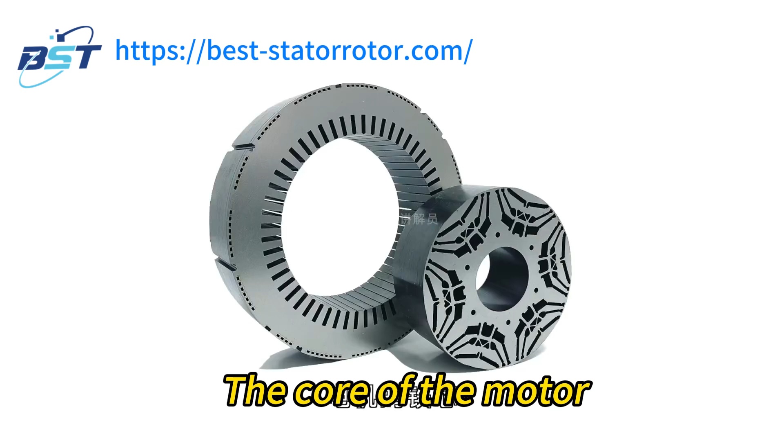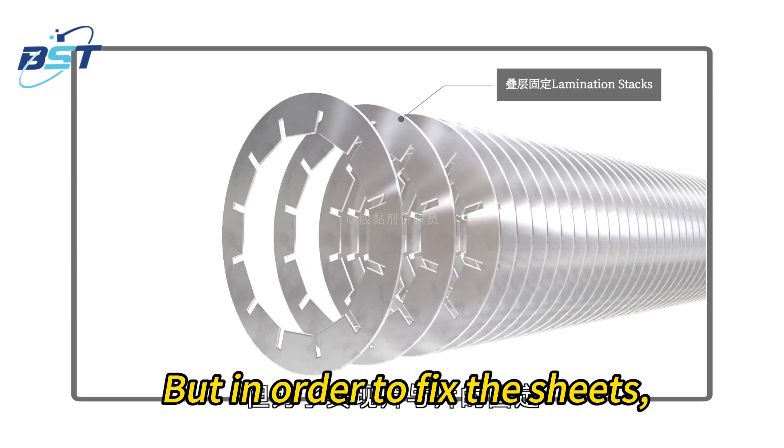The core of the motor, including the stator and rotor, is made by stamping and laminating. The main material used is silicon steel sheet, which is coated with an insulating coating to isolate the connection between the upper and lower pieces. So the ideal core should be like this. But in order to fix the sheets, traditional lamination fixation, welding, and riveting are used.

These processes more or less make the upper and lower silicon steel sheets contact, forming a loop, which makes the eddy current have a longer path, increasing the eddy current loss. Eddy current loss reduces the efficiency of the motor. Therefore, in motor design, reducing eddy current loss has become an unavoidable problem.

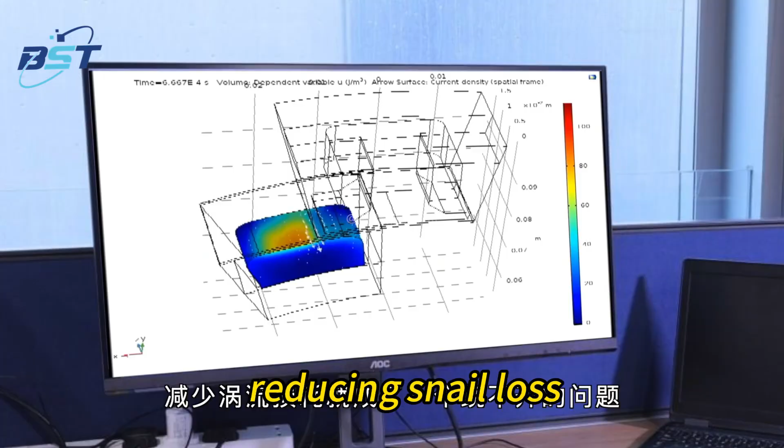What is eddy current loss? According to Faraday's law of electromagnetic induction, when an alternating magnetic field passes through a conductive material, an induced electromotive force is generated inside, which causes electrons to flow inside the conductive material, forming a closed loop. This is eddy current. It will circulate in the material continuously, causing the temperature of the material to rise everywhere, resulting in energy loss, which reduces the efficiency of the motor.

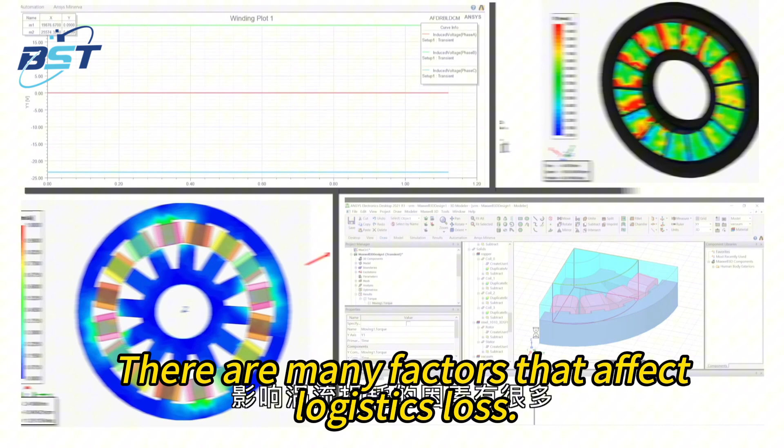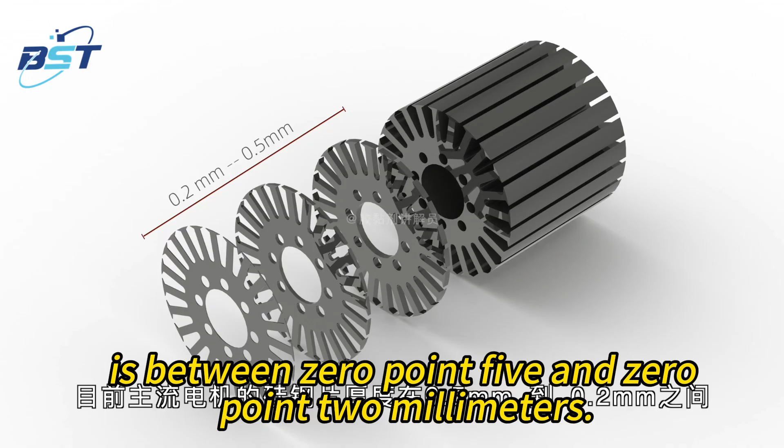So how to reduce eddy current loss? There are many factors that affect it. One of the important factors is the thickness of the silicon steel sheet. The thicker it is, the greater the loss. The silicon steel sheet of current mainstream motors is between 0.5 and 0.2 millimeters. But with the development of technology, the thickness of silicon steel sheet is also constantly decreasing.

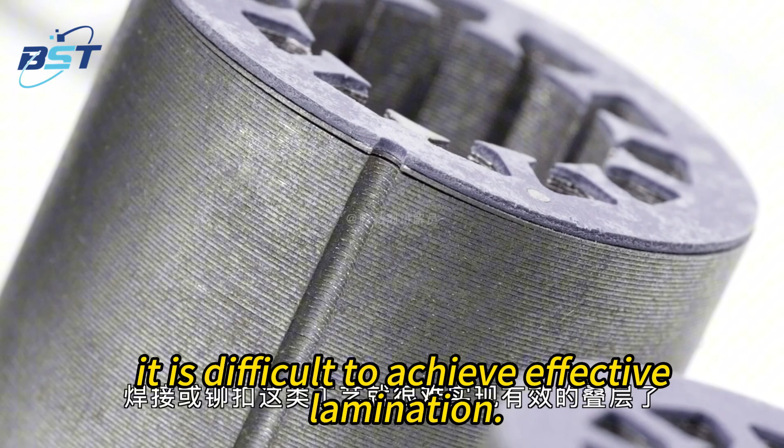But when the thickness is small to a certain extent, welding and riveting processes make it difficult to achieve effective lamination. So the bonding lamination process has become another choice. Currently, there are three main processes: vacuum impregnation process, self-adhesive process, and dispensing process.

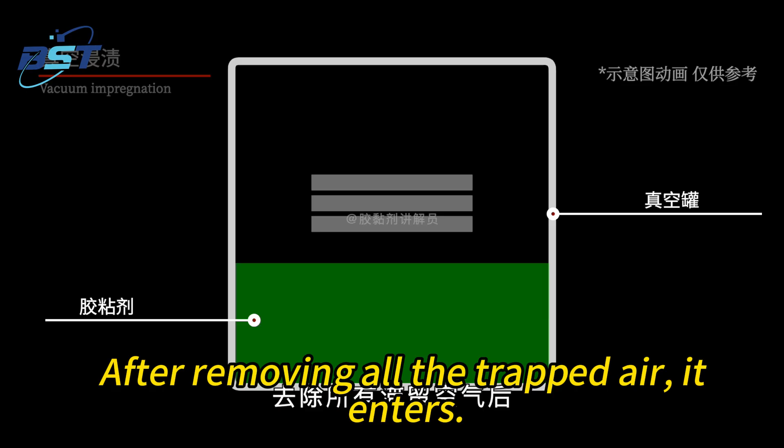The vacuum process is to stack and press clean silicon steel sheets into a flat plate and put it in a vacuum tank. After removing all the trapped air, glue is used to fill all the gaps between layers. Then remove the excess residual glue, clean the laminated surface, and finally heat and cure to shape the core. Cut it into the required core shape when needed.

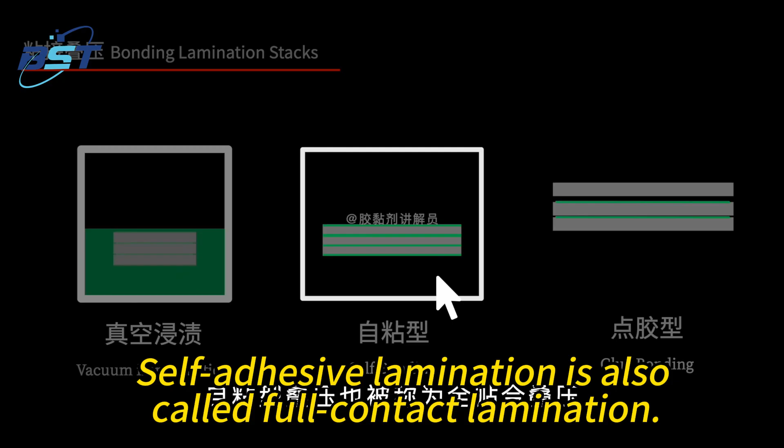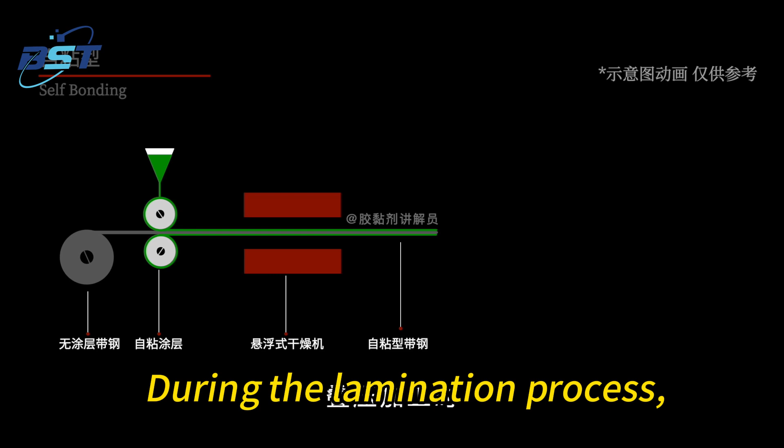Self-adhesive lamination is also called full contact lamination. It is to coat a layer of resin glue on the silicon steel roll. After baking and drying, it forms a micron-scale dry glue film attached to the roll. During the lamination process, use these rolls with dry glue films attached, cut out the required shape of silicon steel sheet, then heat, laminate, and cure to form the core.

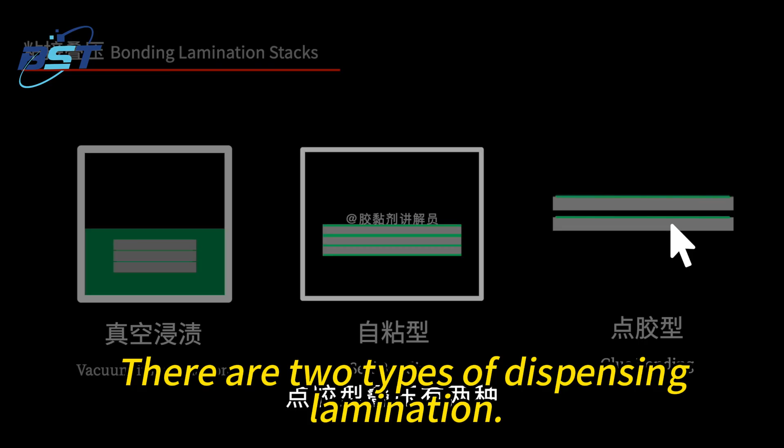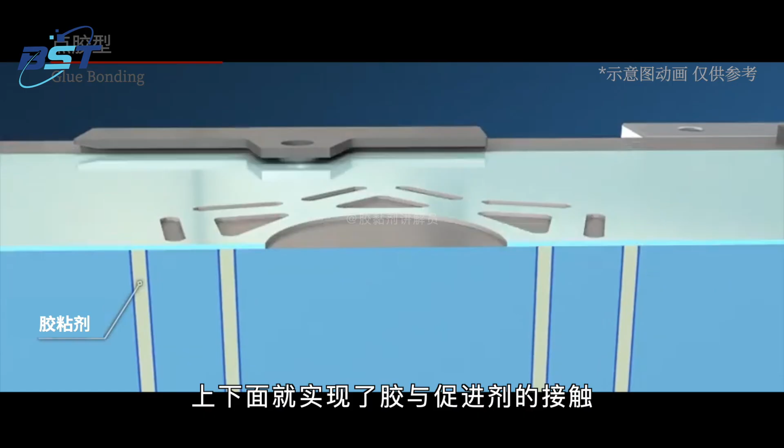There are two types of dispensing lamination. One uses the principle that adhesives and accelerators achieve rapid curing: coat the promoter on one side of the silicon steel sheet and glue on the other side when laminating. The upper and lower surfaces achieve contact with glue and promoter to quickly cure and form the core. The other is on the stamped silicon steel sheet, glue is applied by dispensing or coating, then laminated, and finally cured to form the core.

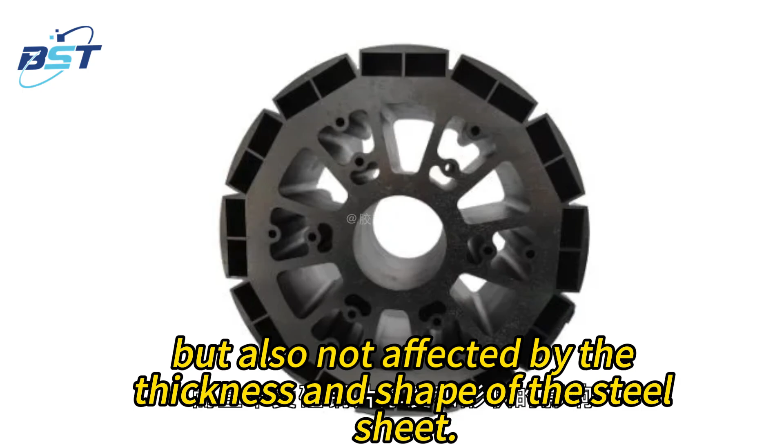It can be seen that the bonding and laminating process not only does not damage the insulating coating on the surface, but also is not affected by the thickness and shape of the steel sheet, effectively reducing eddy current losses. In addition, the adhesive can also disperse external stress, so in an environment where the motor is impacted or vibrated, it can maintain a stable working state.